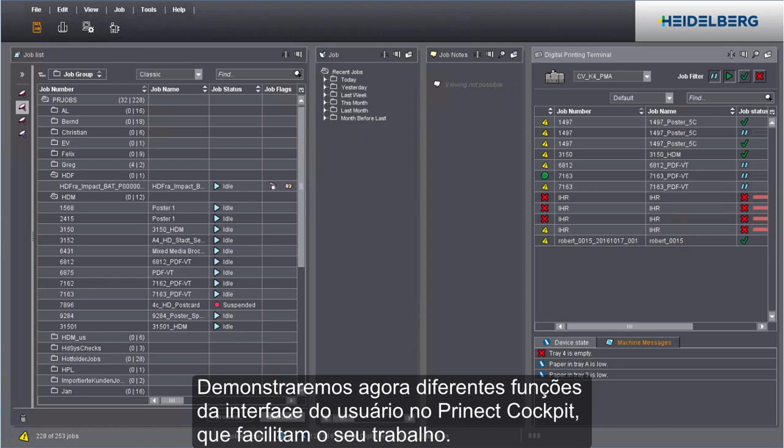Welcome to our tutorial on the user interface of the Prinect cockpit. My name is Carolyn Healy and I'm working for Prinect Service. We'll now show you the various functions in the user interface of the Prinect cockpit that will make your work easier.

A menu bar is found at the top of the user interface. The menu items vary according to the workspace you selected.

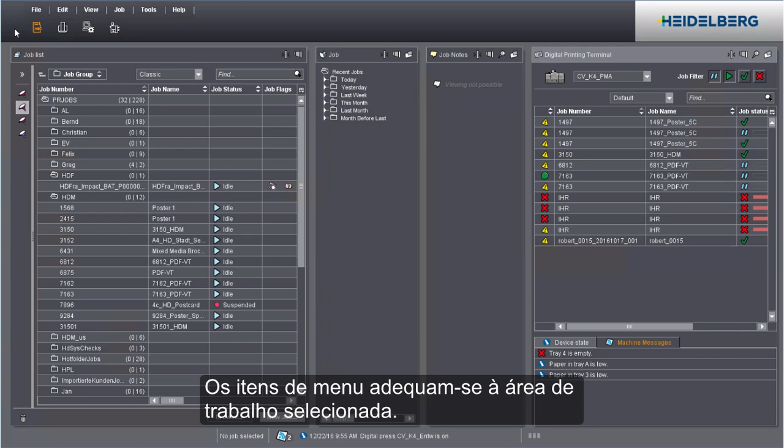The toggle switches are the central controls in the Prinect cockpit. This is where you find the icons for jobs, queues, administration, and digital printing terminal. Remote access, job combiner, analyze point, and scheduler are also found here if you have licenses for them.

All the jobs that are currently in the system display in jobs. They may be listed in groups or subgroups that you set up. Likewise, this is where you can create, open and set up new jobs.

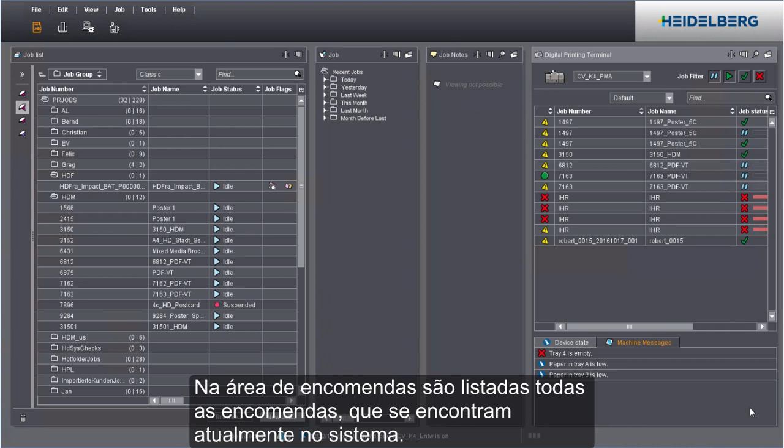You can find information about the various engines in queues.

In administration, you'll find all the tools you need for configuration and management of your work. This includes system settings, user and customer administration, or the setup of sequence templates.

You can control jobs manually in Digital Printing Terminal. You can find more details about this in the video called Digital Printing Terminal.

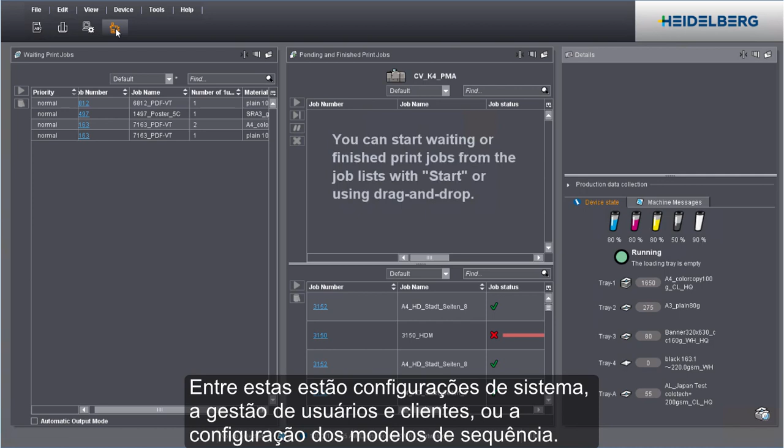You can see recently used jobs in the job window. The job notes window is beside this, where you can enter your job notes about each job. These are assigned to a certain job in the entire workflow. You can view them at various points.

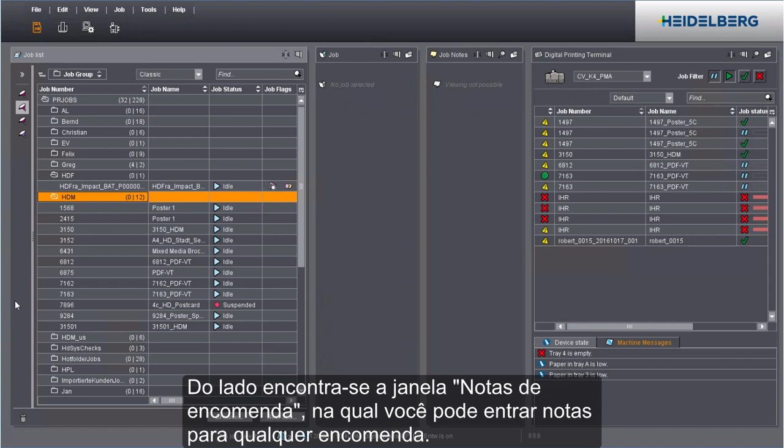To create notes, go to a job. This is where you can save any notes you want.

You can go to a certain workflow step by clicking the icon of this step. You can also invoke a context menu by right-clicking elements. This has commands that affect the marked element.

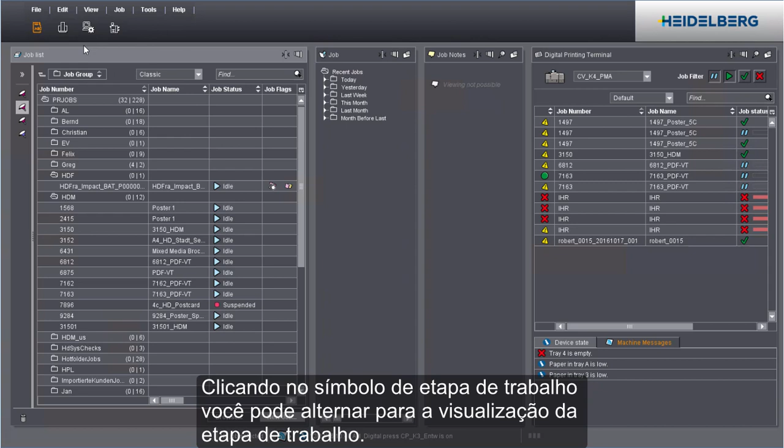The Prinect cockpit gives you a number of ways to customize which data display. In the View menu, for example, you can show or hide lower levels of the job groups.

Likewise, the View menu lets you show and hide the job notes or digital printing terminal.

You can make the size of the various windows bigger or smaller using the minimize and maximize icons. The window stays in the size set if you select the pin icon. The size of the pinned window doesn't change when you resize other windows.

You can make sections in the cockpit a separate window by clicking the Detach from Main Window icon. You can now move the window freely on the desktop or display it on its own monitor. When you close the window, it automatically fits back into the cockpit.

You can also customize the job list view. You can customize the number of columns shown and their order in each of these lists. To do this, click Customize Columns. This is where you can select or deselect any column and change its order.

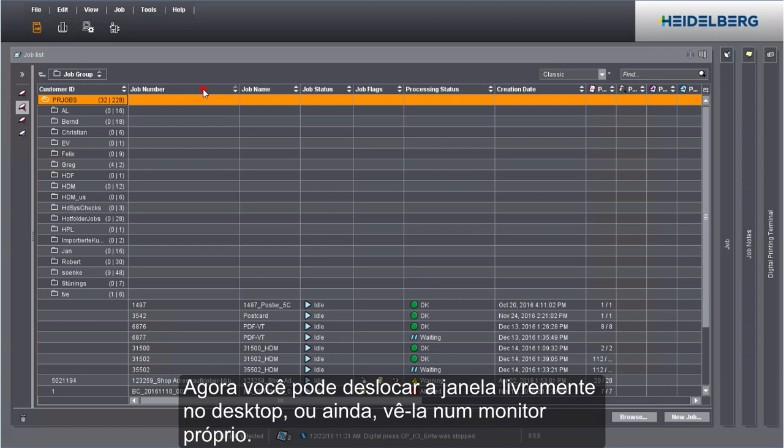Controls for filtering the job list are found to the left of the job list. For example, you can view all finished jobs.

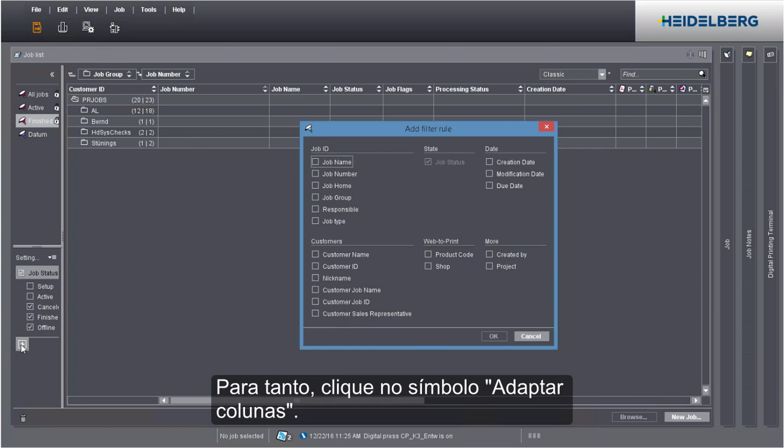Likewise, you can set your own filters. Add new filter rules using the plus sign. Select the options you want and save the filter under a new name.

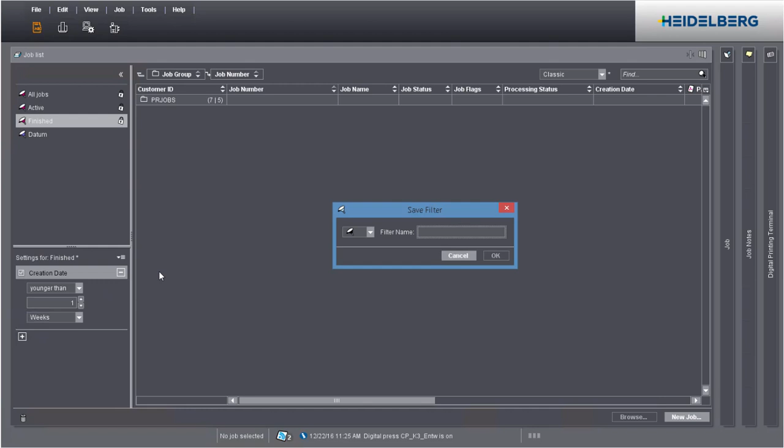You can choose different colors for the icons. This lets you tell your filters apart even if the view is minimized. The tooltip shows you the name of the filter.

You can find details about the settings in the Qualify sequence in the online help. Press F1 to display it.